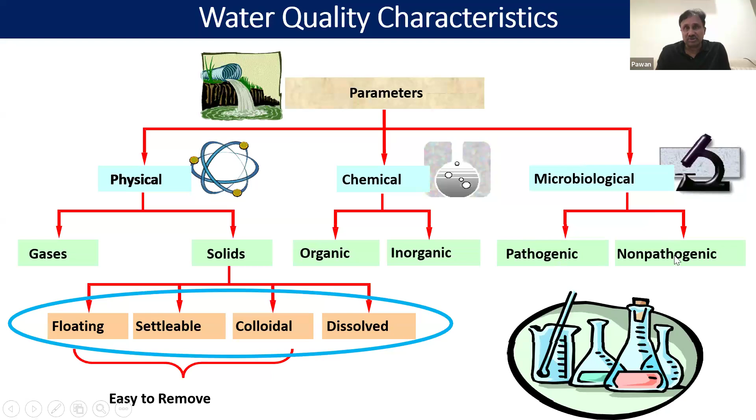I presume most of you are aware of these water quality parameters, which can be divided into physical, chemical, and microbiological. The physical consists of gases and solids. Solids can be further divided into floating, settleable, colloidal, and dissolved. Chemical can be divided into organic and inorganic. Microbiological parameters, which are very important from a health point of view, are divided into pathogenic and non-pathogenic. We can further divide these water quality parameters into different segments.

Physical parameters can consist of odor, color, temperature, turbidity, pH, etc. The demand parameters include dissolved oxygen, biochemical oxygen demand, chemical oxygen demand. The microbial parameters, E. coli, fecal coliform, are indicator bacteria to find out if the water is contaminated through any fecal matter. Then it can be divided into pathogenic bacteria, protozoa, and viruses.

Similarly, we have metals like aluminum, arsenic, cobalt, etc., and toxic compounds like polyaromatic hydrocarbons, polychlorinated biphenyls, pesticides, etc. There are many water parameters which are now emerging, like PFAS and other parameters for which we in India don't have any standard, but they are also gaining importance over the years.

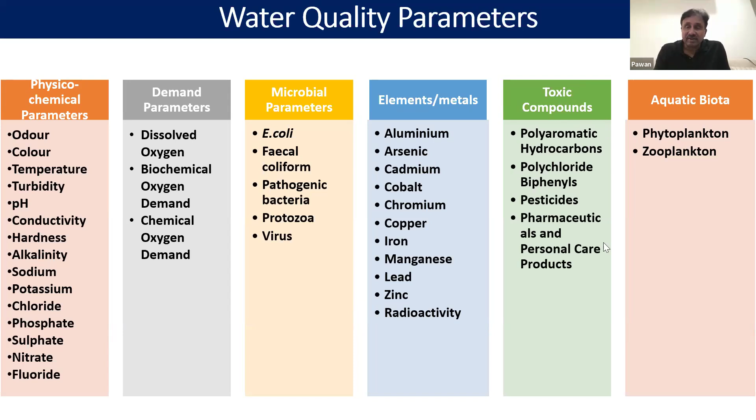So we have standards and guidelines to keep all these parameters within some limits. The most important standard is IS 10500-2012, the Indian Standard for Drinking Water Specification. It provides specifications for almost 70 odd parameters, and all the parameters I listed, except demand parameters, are included as standards for those parameters. In addition, this standard provides methods of sampling and tests for water and wastewater.

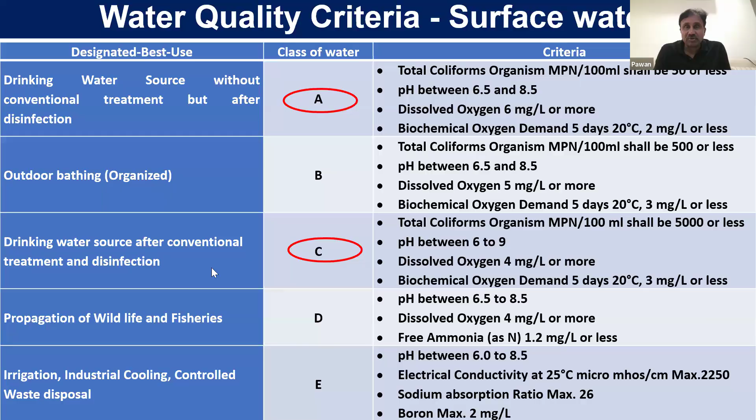Okay, I'll now come to water quality safety status in rural India. What is happening in India? If there are some international participants, I'm sure that the condition in their countries also will be more or less the same if they're from a developing country.

This water quality monitoring and surveillance framework, brought out by Ministry of Jal Shakti through Department of Drinking Water and Sanitation in 2021, is an excellent document which clearly gives the idea of how water quality monitoring should be done, what should be the status of district water laboratories, what equipment will be required, and what the manpower requirement is. I suggest those interested in working on rural drinking water quality monitoring and surveillance should refer to this.

Before that, I was involved in preparation of the Uniform Drinking Water Quality Monitoring Protocol in 2013, which the Ministry released, and that brought out a series of changes as far as water quality monitoring and surveillance in rural India was concerned. Many laboratories were established, and now there are more than 2,000 water quality laboratories which are NABL accredited. So we have really come ahead as far as water quality monitoring in rural areas is concerned.

As per this framework, these 16 parameters, which we can call rudimentary parameters, are to be analyzed in district laboratories. All the states have established state laboratories in which we can monitor all 70 parameters, except some radiological parameters. Whereas these district laboratories are being set up in each district of India, and it has been made mandatory to analyze these 16 parameters for all the drinking water sources.

So if you go to this IMIS, Integrated Management Information System, you get the data of all the states in this particular format. You can click on any of the states, Andaman Nicobar, Andhra Pradesh, and suppose if you want to know the data of Tamil Nadu, are you able to see it? Yes, sir. Okay, great. So Tamil Nadu, they have given the data for all the districts.

So this is for this financial year. And see, Ariyalur have tested, I think, 6,300 sources, out of which 35 had chemical contaminants, and there were bacterial contamination in 88 sources. So this is really excellent.

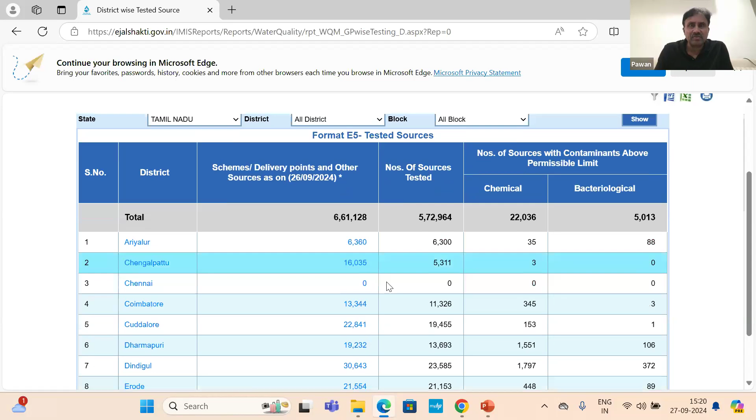So in Tamil Nadu, if you see, they have about 6,61,000 sources, out of which 5,72,000 have been tested. So this is an excellent demonstration of the fact that we are really working very hard, not only collecting water quality data, but even disseminating the data.

And there comes the role of the water safety plan.

Chaitanya, is it visible? Yes, sir. Great. I'll give just one small example of how actually the state disseminates their data, and this is from West Bengal.

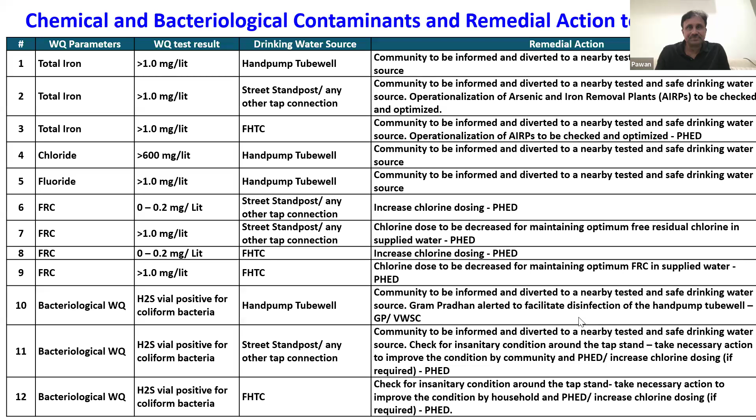Now coming to urban areas. In March 2024, the Central Public Health and Environmental Engineering Organization under the Ministry of Housing and Urban Affairs released a water supply and treatment manual. There are chapters in 2 volumes which highlight how water quality monitoring and surveillance should be done. This document covers the approach to water quality surveillance, water sampling methodology, sampling location and frequency, establishing monitoring and surveillance mechanisms, planning and implementation, and reporting water quality data to the community, as I gave an example for rural areas.

Similarly, they suggested that we should intimate the water quality data to the community, along with database management and record keeping. The water quality management system in urban areas is not as robust as in rural India, because data in urban towns is not aggregated - it's disaggregated. We have proposed in this manual that we should have a similar system in urban areas, so that if somebody wants to access data at a glance, he or she should be able to.

As I told you, they have specified where water sampling should be done - at the intake or tube well, at the inlet and outlet of the treatment plant, and at the inlet and outlet of the elevated service reservoir. There's something known as District Meter Areas, which are hydraulically isolated, independent areas. We should also monitor at critical points in each DMA and at district locations in the network. These locational indications are already included in our manual.

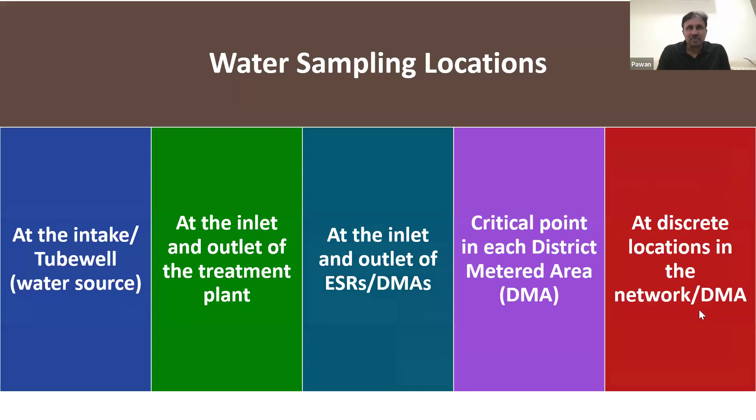As far as the distribution system is concerned, parameters are very limited - turbidity, conductivity, pH, E. coli, thermotolerant coliforms, total coliform, and residual chlorine. So for the source, we have recommended analyzing all 70-odd parameters, whereas in the distribution system, once we've established the source is free of contaminants and are providing ample treatment, we only need to monitor these 6 parameters.

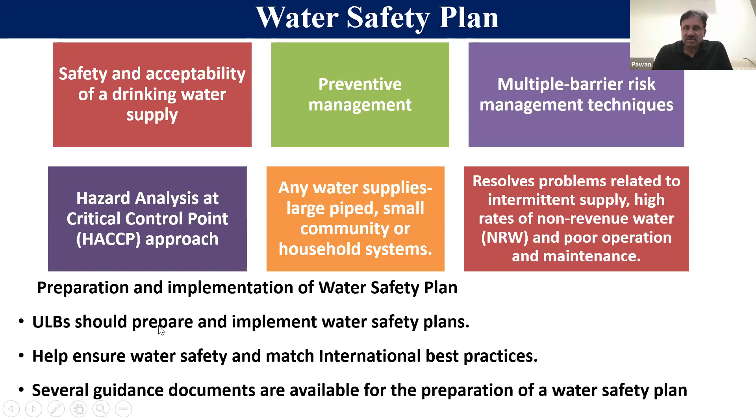It has been recommended in this manual that a water safety plan should be prepared for each utility, and I'm sure that during the course of the next 5 years, most of these utilities will definitely have a water safety plan prepared for them. So I'll move on now. This is all about water quality - we have really progressed very well in the last 10 years or so, and our laboratories are annually accredited. We can monitor the water parameters we need to monitor.

Now we have to ensure how to utilize the water quality data which we have generated over the years, and are generating for all sources. There's no use in collecting water quality data unless we ensure we have preventive or curative measures in place, so that we guarantee safe water supply to the community. So what is a water safety plan? Why do we need it? Why is end-product testing compliance not enough? Though it's really a good measure that we undertake water quality monitoring, it has limited utility - it's reactive, not an anticipatory mechanism.

This is because a problem has already occurred - I've given two examples, Kota and Walkerton. It's more reactive as far as water quality monitoring is concerned. Those involved in water quality monitoring, surveillance, and sampling know it takes time, and that's why the response for corrective measures is also delayed. In this schematic, you'll see that if the water becomes contaminated here, we test the water even after contamination, before we actually submit the results, which can sometimes take 24 hours - the turnaround time recommended for rural water supplies is 2 or 3 days, but it sometimes takes even more time. By the time we get the test result and come to know the water is already contaminated, the consumers have already consumed the water.

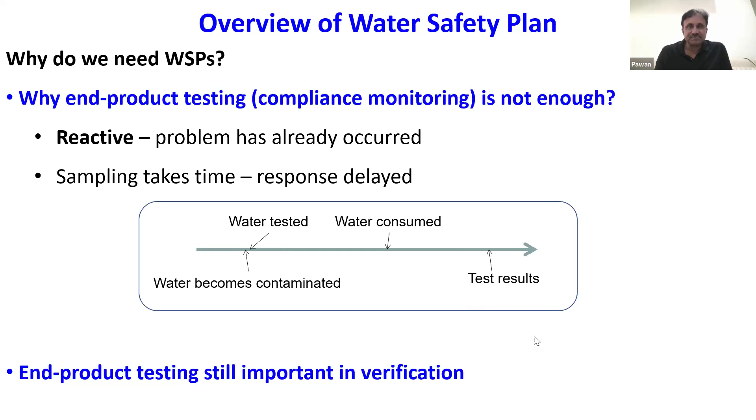This water safety plan is not new, and it is not only restricted to developed countries. It has already been implemented in 93 countries. I think as of today, it should have been implemented in more than 100 countries. So we are not doing something which is rocket science. We have been doing it. We can easily do it. The only thing is that we should have some motivation to do it.

Most of you work in this particular segment, so you might be aware of the different elements of a water supply system. We have a catchment - specifically, a watershed. When we are exploiting or using groundwater, we call it a watershed, whereas when we're using it for surface water sources, it's known as a catchment area.

So the water flows to this catchment area, it comes to the source, and this can be a reservoir. From there, the water is sent to the treatment plant, and after treatment, it's stored in storage, and normally through gravity we distribute it to households. This is a typical water supply system used globally, not only in India.

So what is a water safety plan? It's a comprehensive risk assessment and risk management approach that includes all steps in the water supply from catchment to consumer. So we have to manage water quality risks here to provide safe water. Risks are events which can contaminate your water, and these events can be anything. I'll discuss in detail as we go through the presentation what these risks or hazards are to the entire water supply chain, because of which the water can get contaminated.

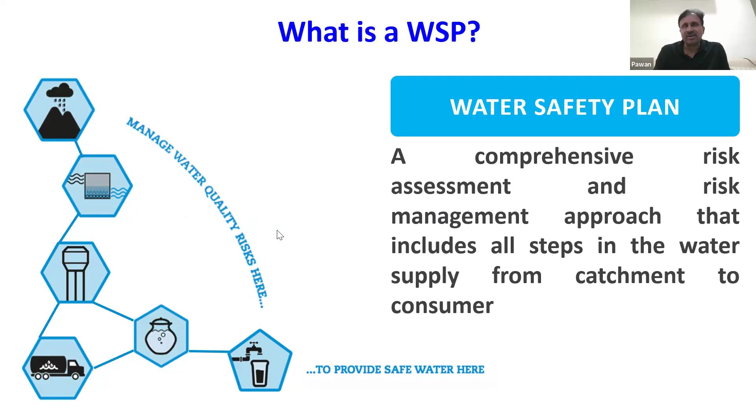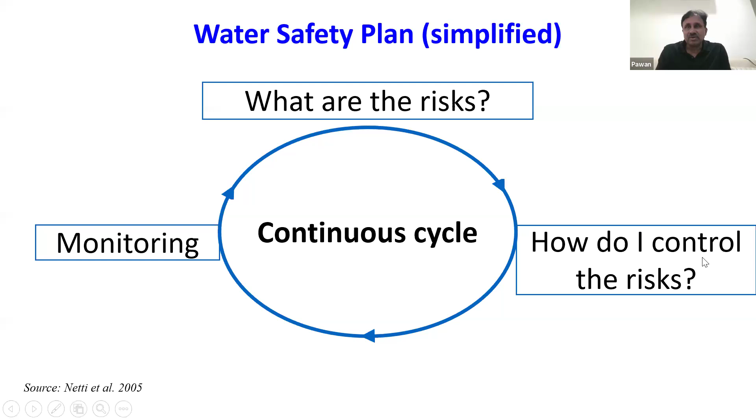So what we have to do in a water safety plan is identify these risks - what are the risks to the water supply chain, right from catchment to consumer. How should we control these risks? And later on, how should we monitor the effectiveness of this control? So this is, in a nutshell, what the safety plan is.

There are various steps in water safety plan preparation, and people feel it's slightly cumbersome, but I don't think so, because I was involved in water safety plan preparation since 2005. So I know it's not very difficult, because as I told you, WHO introduced this in 2004.

So we have to do something known as water supply system mapping. We should know our system. If you ask anyone - say I'm from Nagpur, or even in Chennai - from where you get the water, the normal response is that we get it from the tap. But it's a complex network system, and we need to know how the water supply system works.

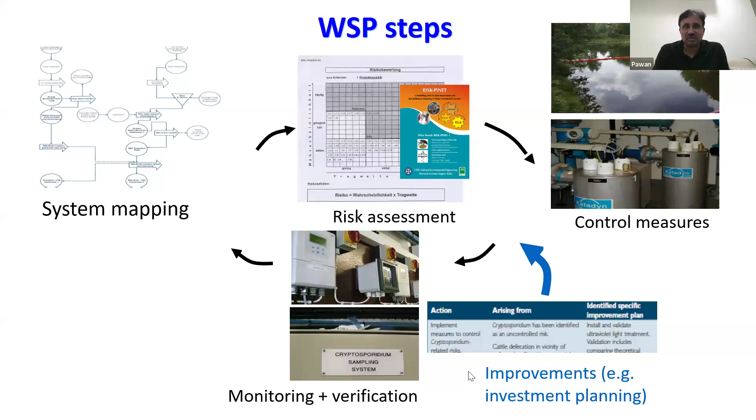Then we carry out a risk assessment. We introduce some control measures. And if these control measures are not enough and the risk still exists, then we have to go for improvement. To know the effectiveness of these improvements, we have to do something known as monitoring and verification. That's how it's a cyclic process through which we ensure that these risks are eliminated or minimized, at least, so that we get safe water.

So this is the WHO manual. I think it was published in 2012. I'm going to tell you about a case study which we did in 2013, 2014, here in Nagpur.

It was like 11 steps, 11 modules through which this water safety plan is to be prepared. First is assemble the water safety plan team, then describe the water supply system, identify hazard events and assess the risk, then determine and validate control measures, develop, implement, and maintain an improvement plan. Then we have operation monitoring, management and communication, and feedback and improvement - that's how WSP is prepared. I'll skip a few of the steps here, but I'll explain some important steps of the water safety plan.

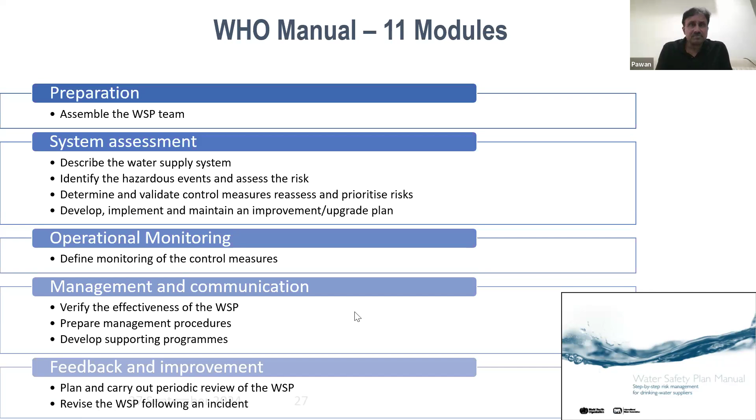So now I'll come to this particular water safety plan which we prepared for Nagpur water supply system in 2013, 2014. We continued to do this, I think, for the next 5 years, so 2019, I think till COVID, we continued to improve this water safety plan.

So this is in Nagpur. Nagpur is located in Maharashtra, and it has an area of 217 square kilometers in 2011. The population was 2.5 million, and the water supply is controlled by Nagpur Municipal Corporation. As in Chennai, it's controlled by a Water Board.

We had 80% coverage, meaning that 80% of the households in Nagpur were receiving water supply. There were like 225,000 household water supply connections. We were using a lot of water, about 650 million liters per day.

Now its population has increased to almost 30 lakhs, but we have restricted our water consumption to almost 700 MLD by reducing something known as non-revenue water.

So at that time when we did the study, there was 50% non-revenue water, and 60% of the population was receiving less than 135 liters per capita per day of water, which is the recommended norm by CPHEEO, with 4 to 24 hours of supply.

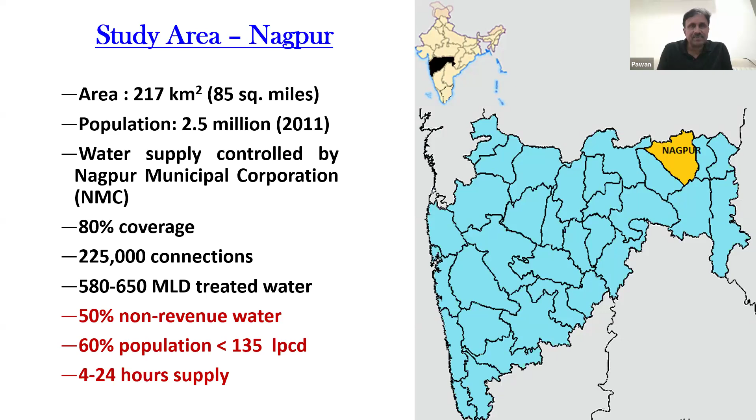So this is a schematic of Nagpur. I'll take some time, please bear with me. We have a river, Pench River, and then there was a dam we constructed, a pickup weir we call Pench Khairi Dam. From there we take water by a 2300 mm pipeline, and we had constructed the Pench 4 water treatment plant.

We have this pumping station, and we have three water treatment plants. They're very small, like Pench 1, Pench 2, Pench 3, and they supply water to 3 master balancing reservoirs and a network of elevated service reservoirs.

This supplies almost 400 MLD of water to Nagpur, whereas the Kanhan River supplies almost 200 to 225 million liters per day. We have also constructed a water treatment plant here which supplies water to the eastern part of Nagpur. So this is a bird's eye view of the Nagpur water supply system.

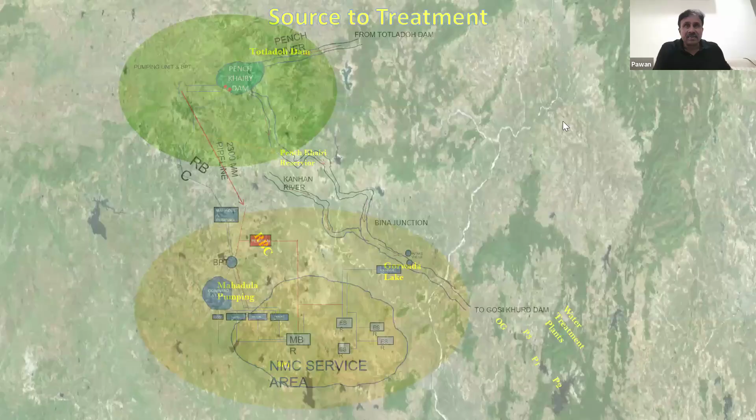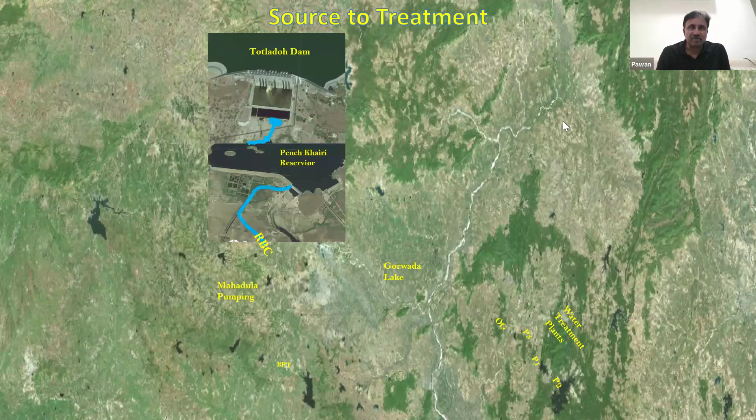When we started working on this in 2011-12, the water supply system was slightly different. There was the Pench Khairi pickup reservoir, from where we had the right bank canal, and from there we were using the Mahadula pumping station to supply an intermediate lake.

So what we were doing actually, from Totladoh Dam, we were transferring water all the way to Gorewada Lake. This was our intermediate reservoir, and from Gorewada Lake we had this network going to the Pench 1 water treatment plant. We had 3 treatment plants here. So this was the schematic around 2010 or so.

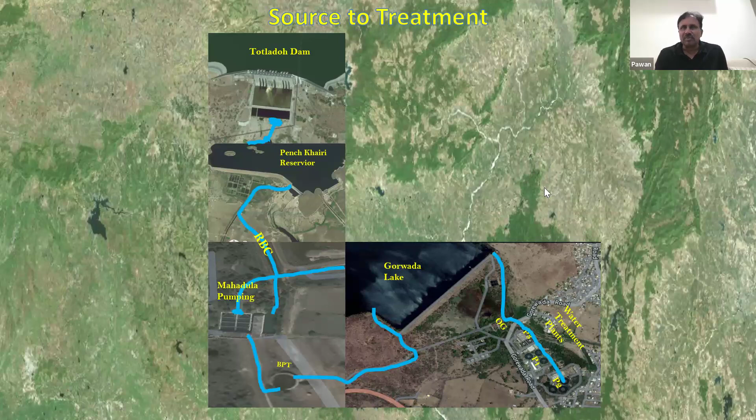This break pressure tank is required, because otherwise all our appurtenances would get damaged, as the pressure which comes through this particular pipeline is very, very high. That's why we use a BPT. This was our network in 2010, and it continued with some improvement in between, but this was basically when we started preparing the water safety plan.

And this is the water supply system. As I told you, we had of course Kanhan River, I didn't show Kanhan River there. So we had the Kanhan treatment plant, and then Pench 1, Pench 2, and Pench 3 treatment plants when we started. Now we also have Pench 4, and there was a small Gorewada treatment plant.

This was at the beginning of the water safety plan around 2013, and then we were pumping this water to 2 master balancing reservoirs having a capacity of 25 lakh liters, and there was another Governor House MBR, and through a network of 60 elevated service reservoirs, we were providing it to consumers.

So this is how we prepare the water supply system diagram for all the cities. If you go to any city, say Chennai or Kolkata, you'll find a similar system there also. The only addition might be that in some cities they use groundwater, whereas we were using, or still use, surface water sources for our water requirement.

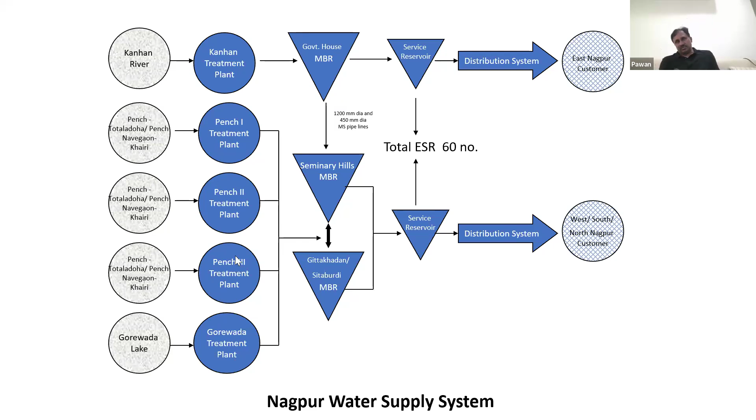So as I told you, we have to identify these hazardous events or risks, meaning the events which can contaminate water. You know that rainwater is not contaminated at all, but as it flows through the catchment, or if it flows through the ground below, then it gets contaminated. This contamination occurs because of something known as hazards or risk.

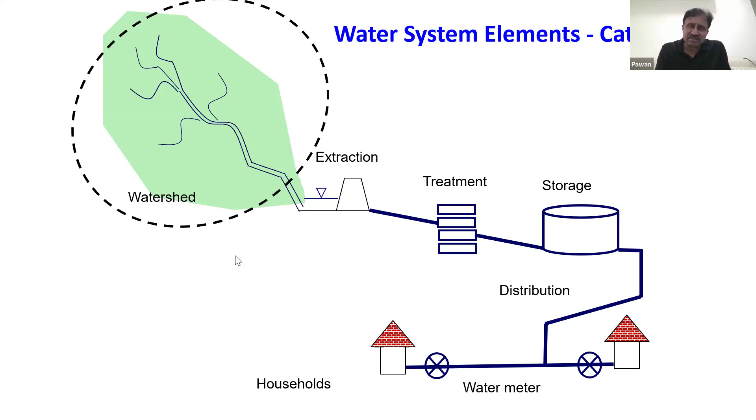So we identify all the possible hazards in the Nagpur supply system, starting from the watershed. I talked about the Gorewada Lake, and the Forest Department of the Government of Maharashtra was planning a zoo there in 2011-12.

This is the catchment of Gorewada Lake. There were plans for a restaurant and offices here, and without proper treatment, this lake would have been completely contaminated, knowing we're putting 400 MLD of water into it. We approached the Gorewada Zoo Authority and Forest Department to locate all infrastructure outside the catchment, and also suggested they install a treatment plant. Fortunately, they heard us, and now the zoo is located out of the catchment.

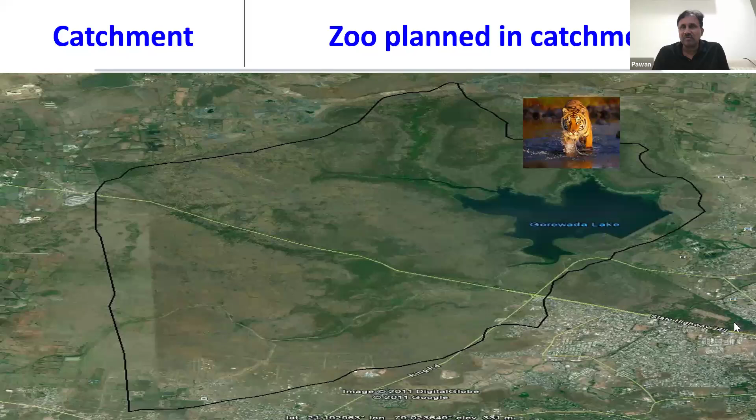Moreover, over the years, we are no longer pumping water to Gorewada Lake, but directly pumping it to three water treatment plants. That improvement was made based on the water safety plan. This was a major hazard. If not appropriately handled, it might have contaminated the entire Gorewada Lake, which stores 400 MLD of water supplied to the citizens of Nagpur.

Now come to the source. This is a classic example where engineering fails, I feel. One of our sources is the Kanhan River, and this is the intake well through which we get water. This was established way back in 1950, around 1955. In 1985, they constructed a thermal power plant, and just upstream of it, they constructed this ash pond. It was very foolish of the thermal power plant authority to construct this ash pond just upstream of the intake well.

While preparing this, we found there was a breach in the ash pond. Part of the water from the pond, which is highly contaminated, had 7.6 mg per liter of fluoride and also contained metals like arsenic. It breached and contaminated our intake well. Normally the water is colorless, but after the breach, our intake well got contaminated. We had to close down this intake well for 3 days to repair it.

This is how we identify possible hazards. If we had done a water safety plan back in the 1980s, we might not have located this ash pond here - we could have placed it somewhere else, so that even if there was a breach, it wouldn't have contaminated our source. This is what a water safety plan is about - preventive measures. This clearly gives an idea about what a hazardous event risk is, and how we should deal with these risks and hazards in preparing a water safety plan. We should try to minimize these risks as much as possible.

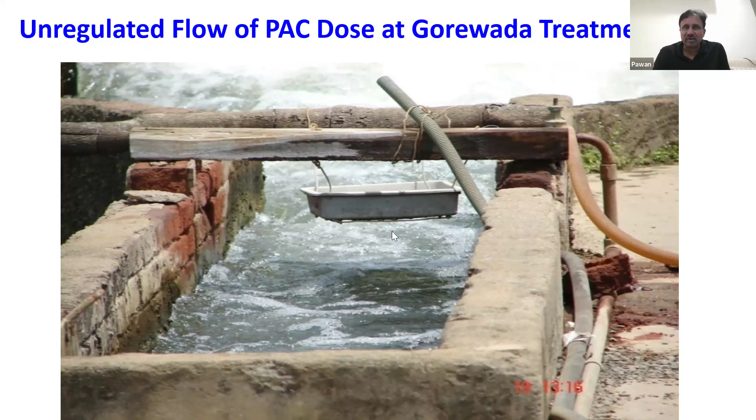Coming to treatment - this is how we were doing poly aluminum chloride dosing at our Gorewada treatment plant. Now we have discontinued using it. It was a British-era treatment plant, treating only 16 MLD of water, so we discontinued it - this was unregulated, free dosing. If you go to any small town treatment unit, the PAC dosing is done this way, which is absolutely wrong. This is not an effective way of coagulating water, and it imparts risk to water supply, because if coagulation isn't done properly, colloidal particles pass through, and the purpose of removing them is lost.

Similarly, you can see the aquatic weed in the clarifier - this is how it looked. I think if you go to some treatment plants even now, I wouldn't be surprised if you see a similar scenario. What I mean is we have to really look at how well our treatment plants are maintained. This is how it was - fortunately, this treatment plant got discontinued.

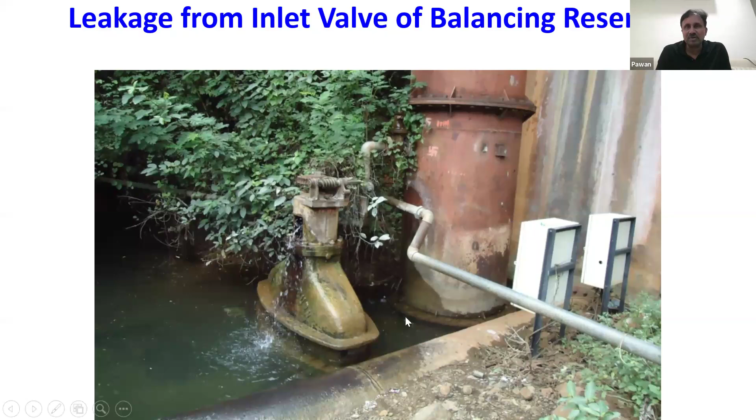Coming to storage - this is the inlet to our Master Balancing Reservoir. This particular valve, if you see, is leaking. What happens is during non-supply hours, the water accumulated here gets sucked into the MBR, the Master Balancing Reservoir, which stores treated water. Because of this back suction, the entire water supply gets contaminated. This is one of the major hazards we identified when we did the water safety plan.

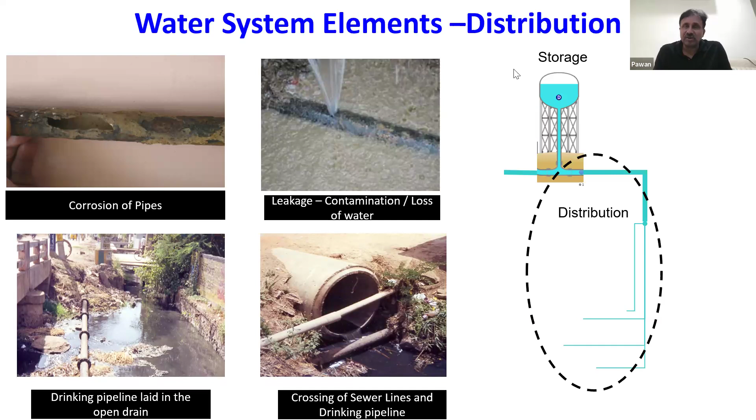So the weakest link in the entire water supply system is the distribution system. We have to be very cautious about it, and we had identified several such hazards or risks which were possibly contaminating our water.

This is slightly technical, so I'll try to rush through as much as possible. We use something known as a risk assessment tool, IRAWDS, meaning Integrated Risk Assessment Water Distribution System tool, in which we collected the entire distribution system's map and tried to identify the weakest pipe in the entire distribution system which might be contributing to contamination.

We collected data from Nagpur Municipal Corporation, and we also did field surveys, and the consultancy generated these GIS maps. Fortunately, most urban towns have GIS maps.

So this is how IRAWDS looks. It has three modules: a pipe condition assessment model, contaminant ingress model, and risk assessment model. We collected data to run these three particular models.

And this credit goes to my colleague, Dr. Abha, who really coordinated the entire work.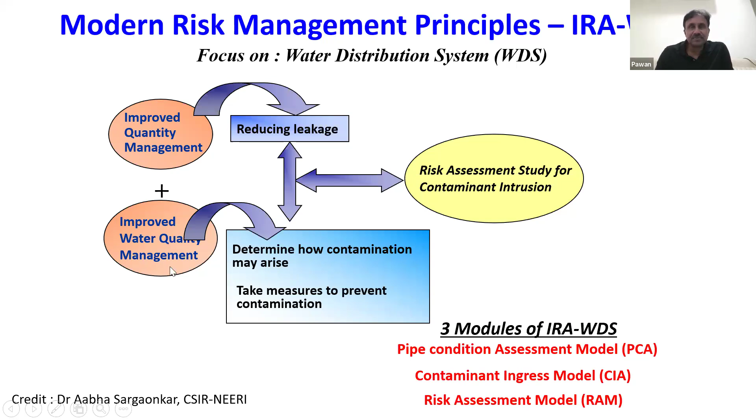It actually determines how contamination may arise, helps take measures to prevent contamination, and improve water quality management. So what we actually did in this is map the water supply network.

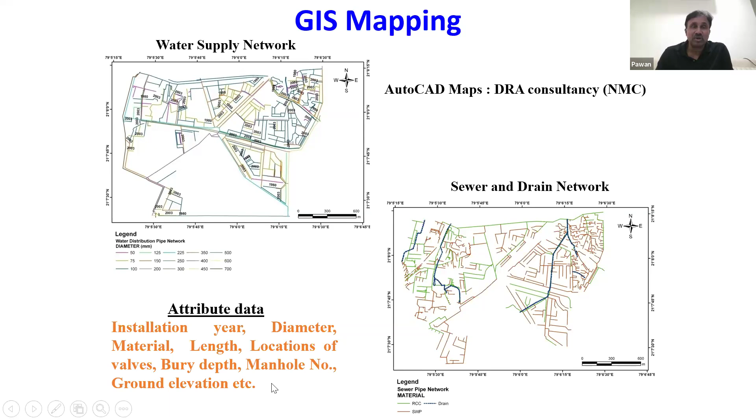Similarly, we also collected maps of sewer and drain and overlaid these maps. In addition, we collected attribute data such as installation year, diameter, material, length, location of valves, buried depth, manhole number, ground elevation - everything we collected.

We also analyzed data on pipe breakages, collected from Nagpur Municipal Corporation - how many breaks in pipes, in which year the pipe was installed, how much traffic load if laid below the road, and how many bursts and breaks occurred. Bursts means where water actually comes out in jet form, whereas breaks is where water leaks.

So we collected pipe material data. For example, a cast iron pipe installed in 1980, with busy medium traffic, 50 to 100 millimeter diameter. How many breakages were there? We had 5 breakage locations, with the number of breaks being 107 and number of bursts being 81. So this data we collected.

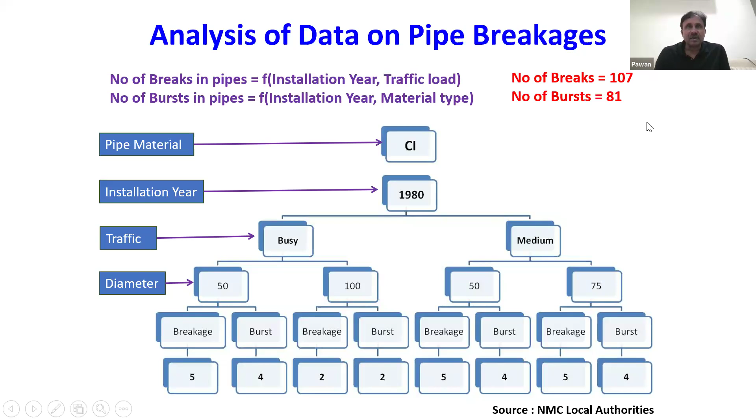So this mapping exercise, this modeling exercise, helped us identify the weakest links in the entire distribution system, and also helped Nagpur Municipal Corporation prioritize pipe replacement.

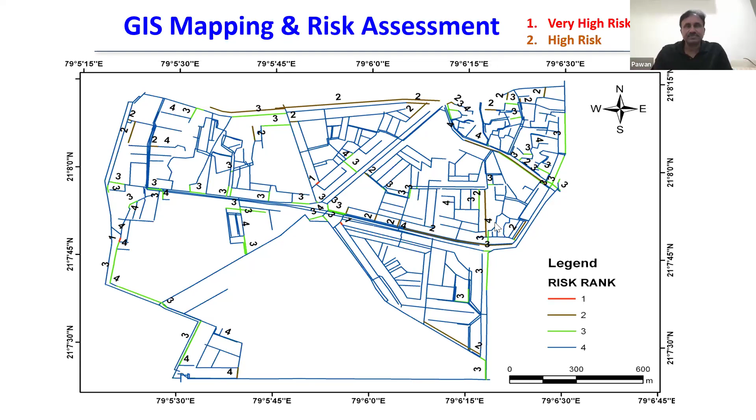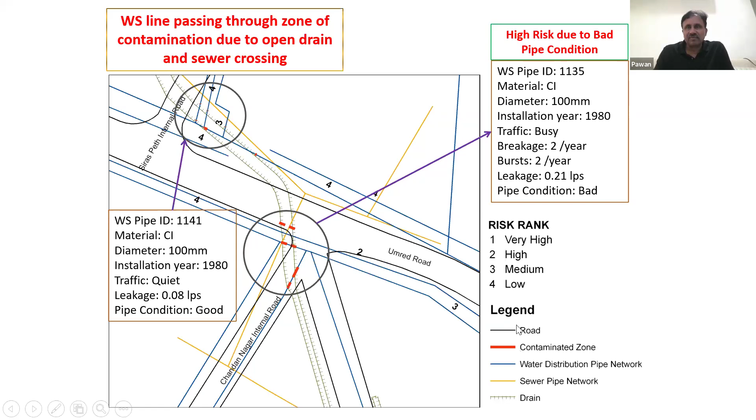If you zoom in, we went into the detail of the pipe IDs, giving different pipe IDs to them. This is extensive work we actually did, showing at what risk level each pipe lies, using different legends.

We also did pressure and leakage monitoring. One issue is that we get results out of the model, but most of the time these results are not verified in the field, and we end up getting wrong results. So what we actually did was field verification at critical locations.

We did extensive water quality testing for various physico-chemical parameters in the localities of Reshimbagh and Wanjari Nagar. We monitored water quality at the elevated service reservoir and at critical locations in the distribution system where we had identified high risk and very high risk pipes, and also did water quality monitoring at the consumer end.

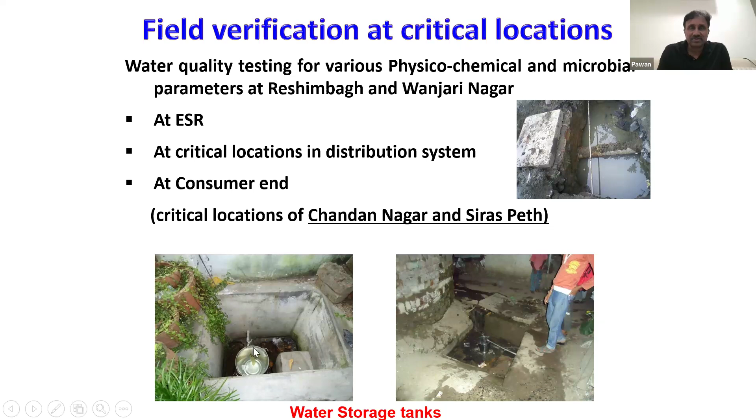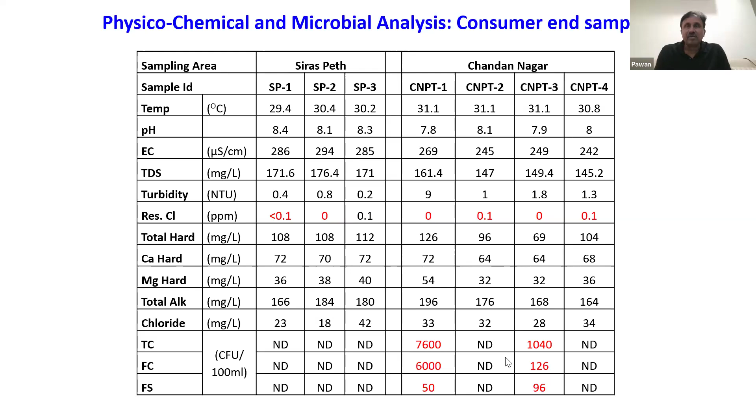We could verify that wherever there were high risk points, we had very low residual chlorine, and at the same time very high total coliform, fecal coliform, and fecal streptococci. So it proved that the findings we got from the model were actually true, and that had been verified by extensive field data also. We were happy that we spent so much time conducting this, collecting data and modeling studies, because it really helped us get good results.

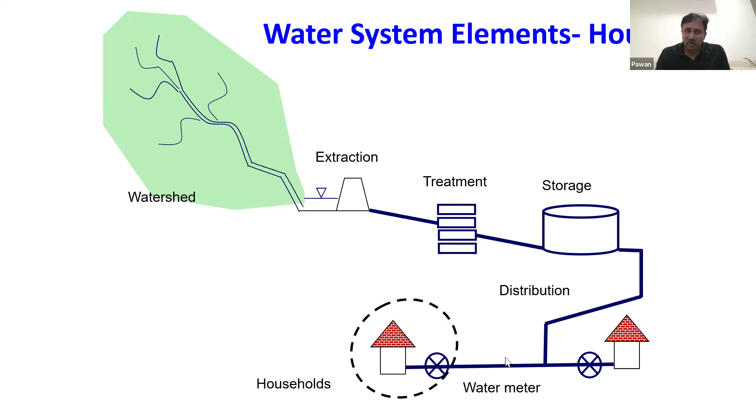Okay, now at the same time, what happens? We also found out that there exists a lot of hazards or risks at household level, and this is a classical example. This was collected in Nagpur in 2013 as part of WSP. At source we found almost 85 CFU per 100 ml of fecal coliform, and it was fairly low at WTP raw water. After we treat water and chlorinate, it will be obviously zero. We didn't find any fecal coliform at the master balancing reservoir, but as the water is transported, we got contamination at stand posts and taps also, though they were fairly low.

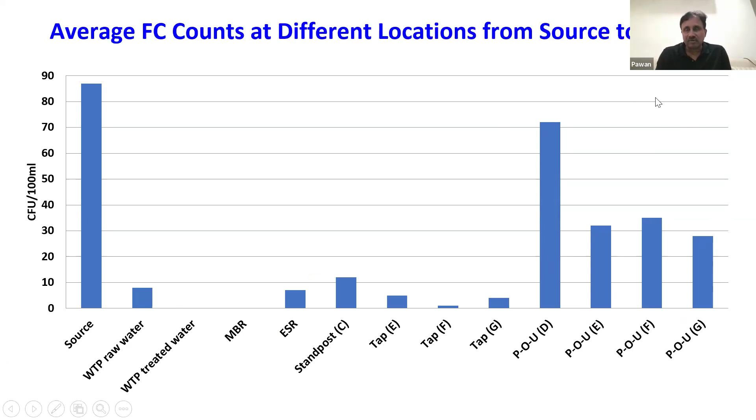But when we collected water samples from households, from a point-of-use perspective, we found that the water gets contaminated back to the level we found at the source. This clearly indicates that we don't normally handle our water appropriately. At the same time, whatever investment we make in treating water gets wasted because we recontaminate water at household level. So we tried to find out the possible risks which contribute to water contamination at household level.

You can of course provide some residual chlorine, but unless we carry out awareness among citizens, we'll badly treat our water and it gets recontaminated. So awareness building is also a major part of the entire water supply system - sorry, it's the water safety plan.

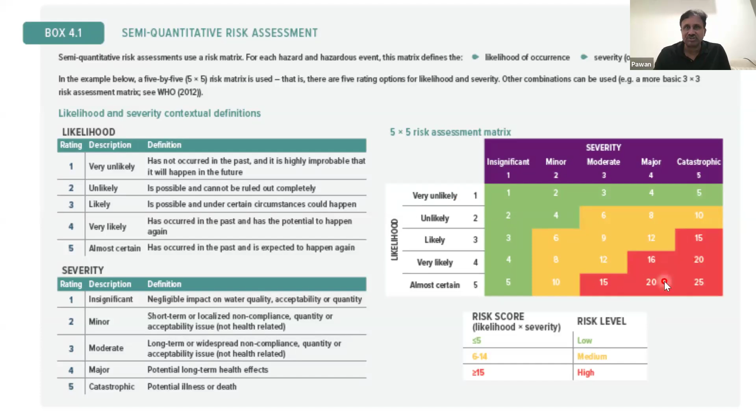Then we have to do something known as semi-quantitative risk assessment. I'm not going into the details since that's another lecture, but this type of matrix is carried out where we determine severity and likelihood. Likelihood varies from 1 to 5, and severity also from insignificant 1 to 5. The red zone indicates a highly risky proposition, and this is how we use this system to map risks.

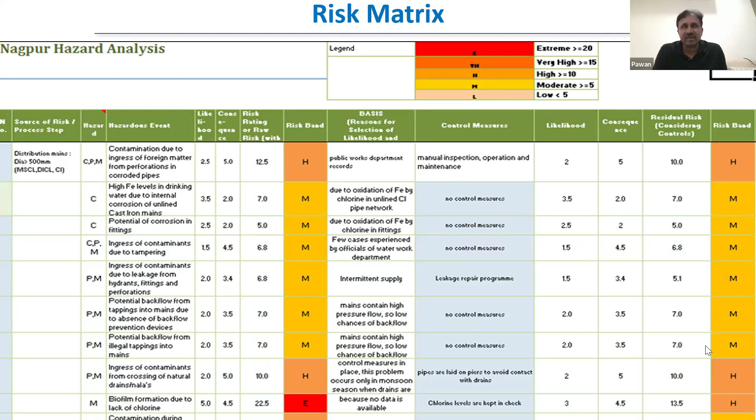So we mapped the entire water supply system of Nagpur and determined this risk matrix for even the smaller hazardous events, for the 109 hazards I just showed you.

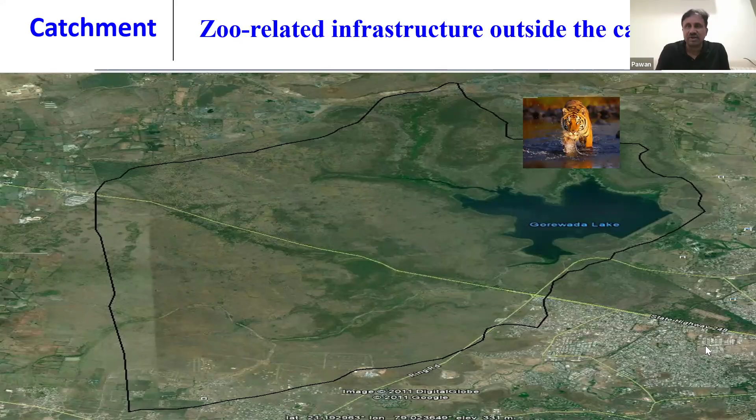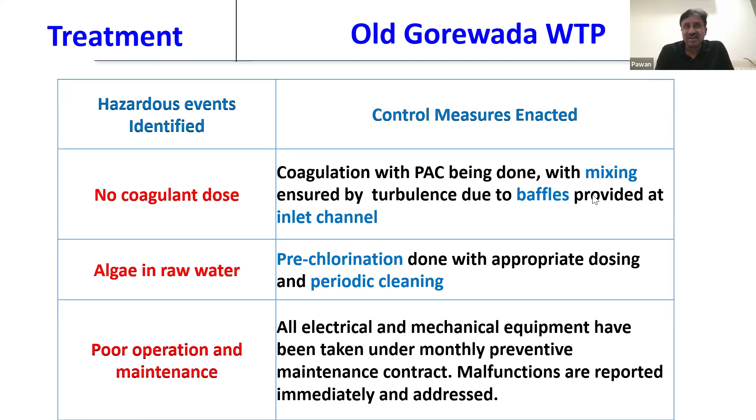So this is how we implemented zoo-related infrastructure - I told you, outside the catchment, we built communication between the power plant authorities and Nagpur Municipal Corporation, so that if a breach occurs, we strengthen the bund around the ash bund also. For treatment, a hazardous event was no coagulant dose - we suggested that. So this is how we suggested strengthening control and preventive measures.

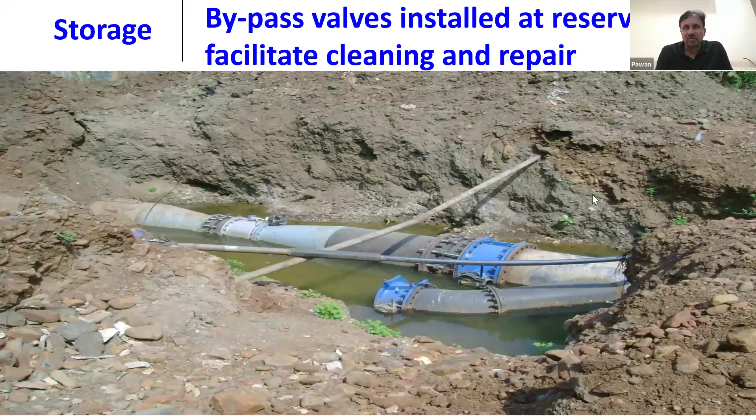You can see the leaking valve you already saw. Instead of that, this valve was changed to a butterfly valve, and it was not leaking at all when we inspected it. I think this was the scenario before - we completely eliminated these pipelines and provided this type of appurtenances on the pipeline.

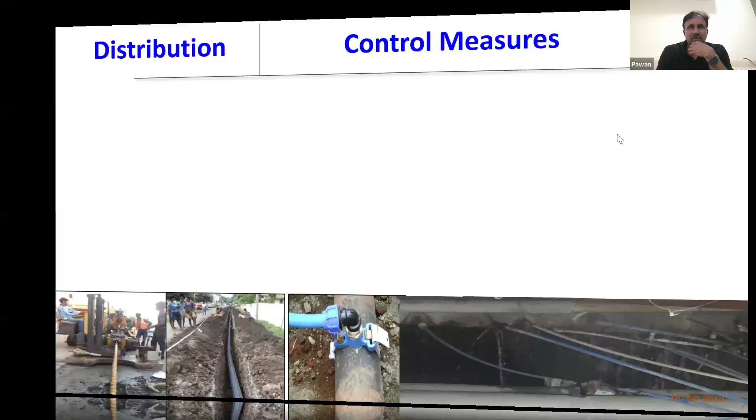Performance indicators also improved - before WSP, coverage was 80%, it reached 90%. Consumer satisfaction also increased. Extent of non-revenue water also came down from 60% to 15%. And water quality also improved a lot.